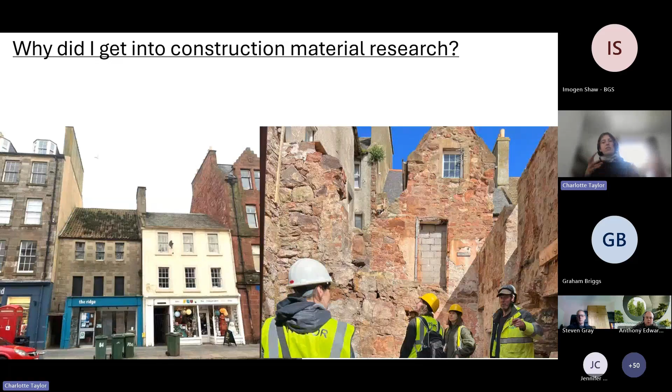So I started my PhD, which is called Ecologically Constrained Building Design: What can we build from the zero emissions resource pool? And fundamentally, it hypothesizes that to reach zero emissions in the UK by 2050, we have to stop using fossil fuels today. And if we were to do that, what construction materials could we still produce?

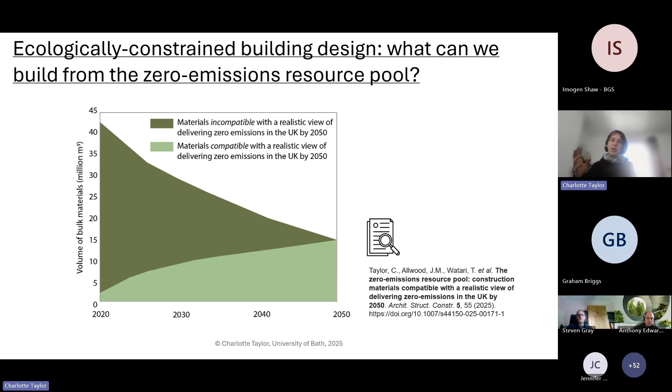And so it says, to 2050, we need to reduce the materials that are incompatible with fossil-free production, whilst increasing those materials which are compatible, all the while reducing resource use overall.

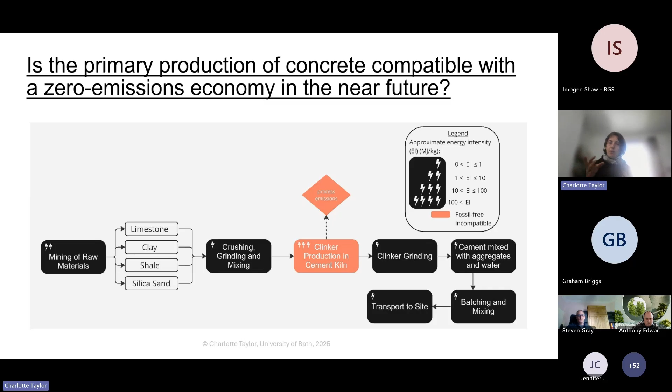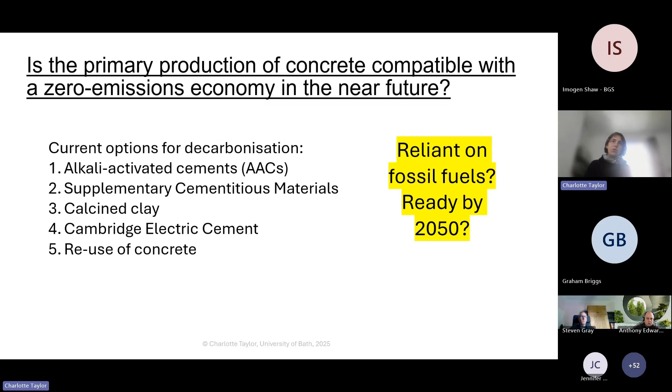So, for example, if we look at concrete, is concrete compatible with fossil-free production? We see that it's not, because during cement production, there's process emissions released, and the current decarbonisation strategies for concrete either still rely on fossil fuels or are unlikely to be ready at scale by 2050. These are some of them. So the only option to use concrete is direct reuse.

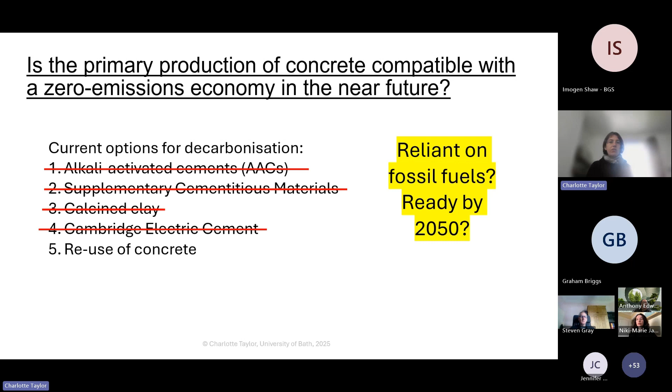Stone, on the other hand, when we look at its production process, we see that every stage along its production and manufacturing can be electrified, and therefore is compatible with fossil-free production, which is great.

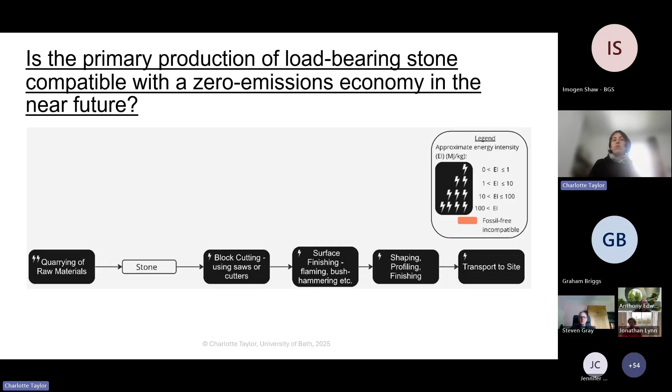But yeah, do we have enough stone at scale? What is the history and legacy of stone use in the UK? It's been used for thousands of years in construction, like Canterbury Cathedral, built in around 600 AD. And then St Paul's Cathedral, obviously built from limestone from Portland. And also whole cities in the UK built from stone as well, like Bath and Glasgow.

But today, because of innovations in the late 19th and 20th century in steel and concrete being much quicker and much more desirable, we now see stone primarily in facade systems where you have very thin sheet tiles, often clipped on to steel frames, creating very complex structures that involve a lot of energy in their production.

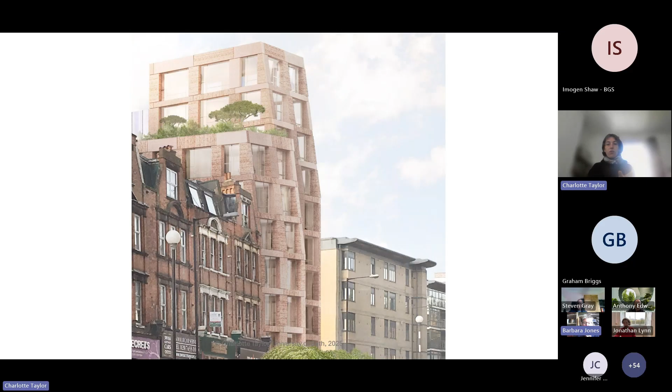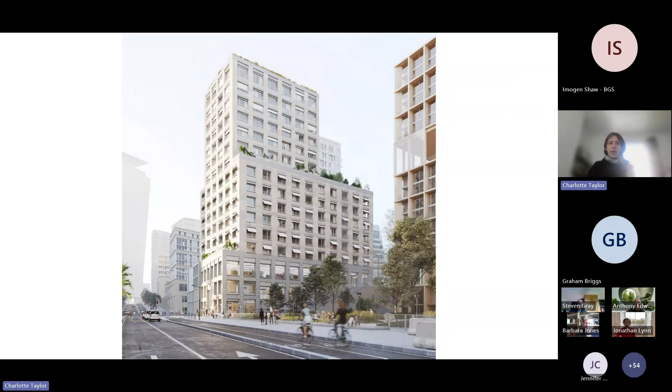At the same time, there is a resurgence now and excitement in the use of load-bearing stone in construction that's starting to become more popular. We're seeing this plan for a block of flats, I think it's 10 stories, by Groupwork Architects, and I think this is in Paris. There'll be 58 apartments built out of load-bearing stone and wood and hemp.

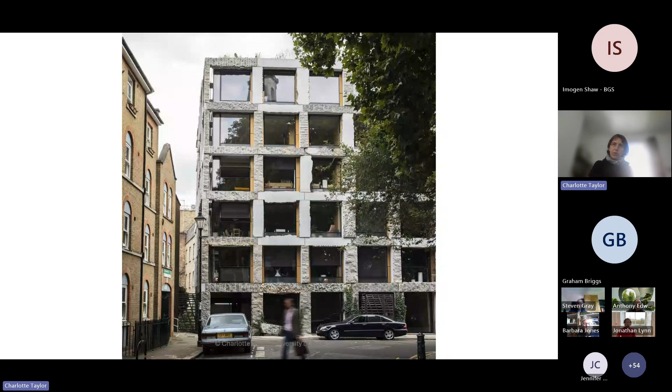And the famous 15 Clerkenwell Close is a classic example of load-bearing stone used in a modern context. And the Stone Collective have created some quite nice drawings of modern examples of stone typologies used in a load-bearing context.

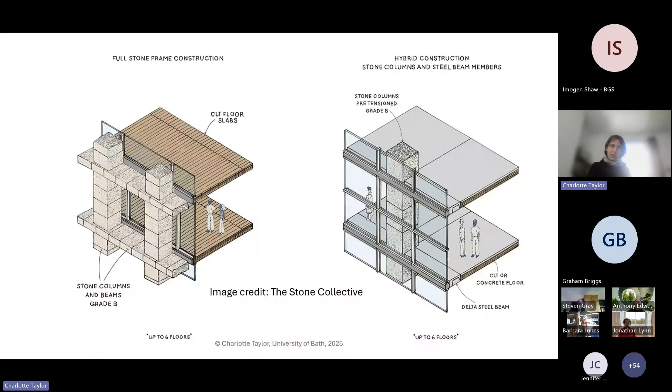Don't know if anyone knows it. It's by my favourite pub, Square and Compass.

This is just one example, but there are many building stone quarries all over the UK. But today we actually import around 80% of our dimension stone, either as raw blocks or as pre-processed products. And whilst there used to be over, I think, 3,000 dimension stone quarries in the UK, there's only around 400 producing today.

So the UK's total output of dimension stone is around 1 million tons, which is in big contrast to the nearly 200 million tons of crushed rock aggregates produced every year. And this is also surprising when 98% of major cities in the UK are within 80 kilometers of a stone quarry, we found in our study.

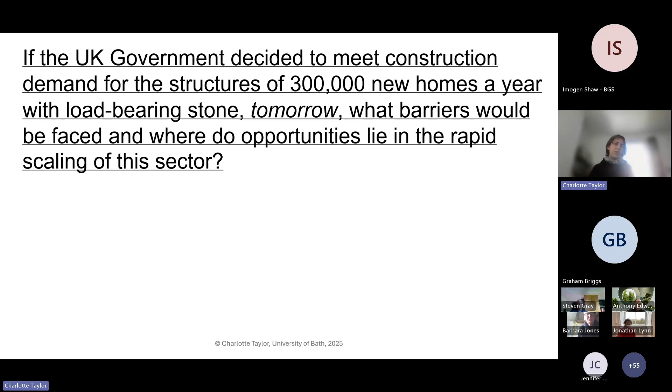So these findings and understanding of the potential for load-bearing stone in the UK, in conjunction with its history and compatibility with zero emissions, made this research question arise: if the UK government decided tomorrow to meet construction demand for the structure of 300,000 new homes a year with load-bearing stone, what barriers would be faced and where do the opportunities lie in the rapid scaling of this sector?

So I'm now going to speak about a research paper that was recently published, the output of a research project last year with fellow researchers at the University of Bath. And I'd like to say I don't know everything about the scale-up potential of load-bearing stone. This is, I guess, a step in the right direction, but there's still a lot of future work.

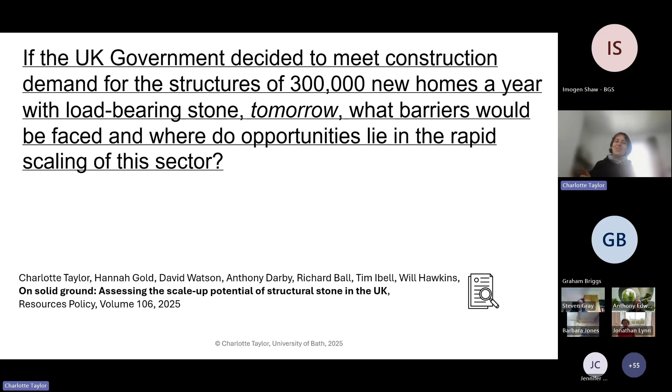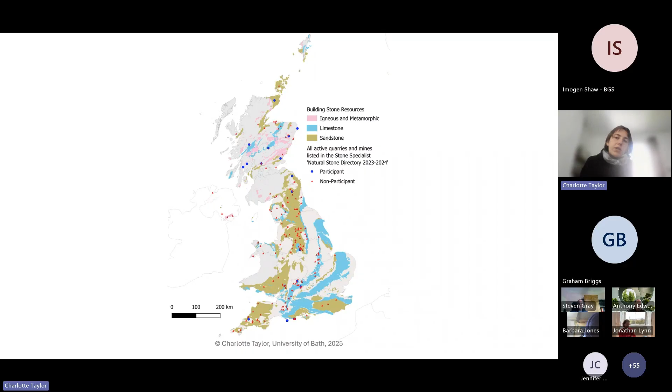Our approach to attempting to answer this question was to use interviews. We interviewed 19 different building stone and aggregate quarries across the UK and Europe, involving site visits and online interviews as well. There were 12 UK participants and 7 non-UK participants from Europe and other countries, a mixture of dimension stone and aggregate businesses.

So I'm just going to talk about the findings I think are most interesting: the total stone resource, the underutilization of stone, the decarbonisation potential of stone, the labour requirements for scaling up, and the market demand and cost of load-bearing stone.

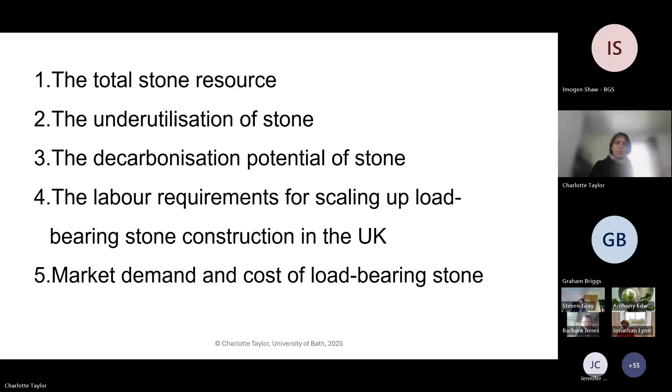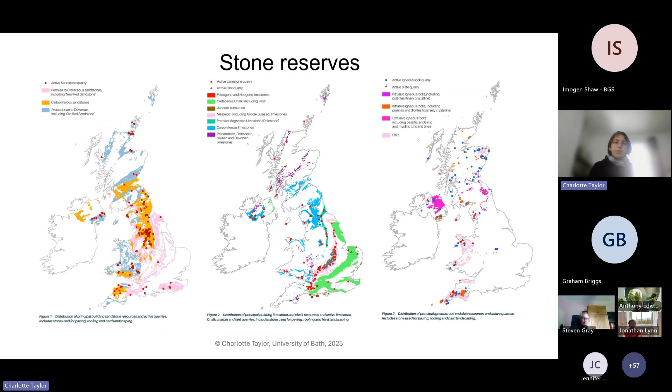I think Imogen will speak a bit more to this, but we have in the UK widely available limestone, sandstone and igneous building stone deposits. But we were really interested in finding out whether the current quarry locations and the reserves of load-bearing stone are limiting to scaling up. And we found out basically that no, it's not.

So we found that often the businesses were saying that they needed the processes to be streamlined, and like planning approval should be made a lot quicker to encourage scaling up. I'm also just going to read out some of the quotes from the interviews because I think they're quite interesting. I don't want to lose their nuance.

So one participant said, the largest quarry area with permission to extract stone is the 75-acre site. It has been operating since 1980 and we've only worked across 8 acres in that time. Another said, operations could continue for another 1,000 years at the current extraction rate. So that just gives you an idea of the scale of stone reserves, and basically that the permitted reserves and total reserves are not the limiting factor.

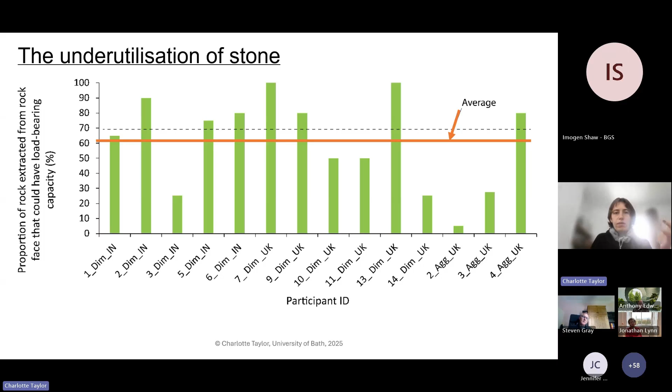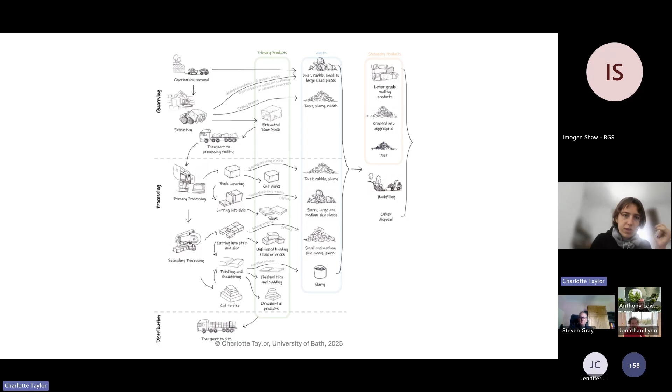So I guess most of the rock has load-bearing capacity, but it's not used in a load-bearing capacity when it's sold or used in construction. And it's mainly used in walling products or facade products. So in this diagram you can see how stone starts off extracted as a raw block, but then cascades, the more you process it, into slabs, into walling products, into ornamental products. This is what's typically happening at the moment.

So we did quite a lot of site visits, which was fun, going down different mines to try and understand the scale of rock or stone that is extracted and maybe wasted. A lot of the quarry operators don't like the word waste because they believe that there isn't any, because if they're not using it, they crush it into aggregates. But I guess waste for us is rock or stone that doesn't reach its load-bearing potential by getting utilized in construction.

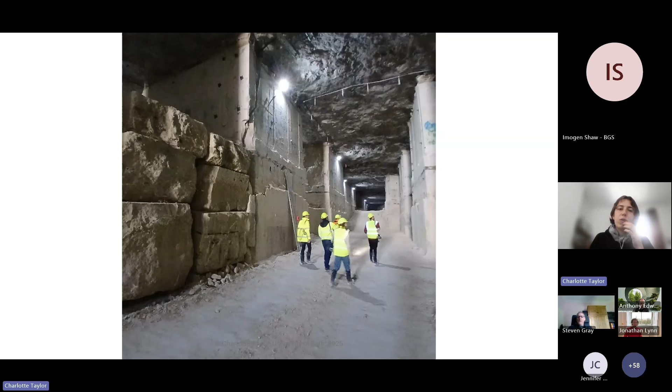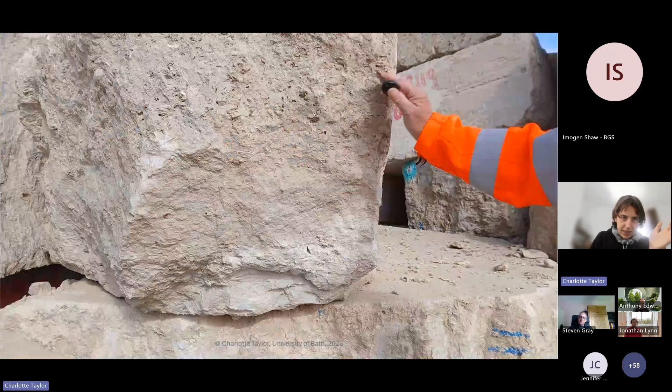So we found that stone waste arises primarily from inefficient extraction techniques. So if you're specifying too deep blocks and you can't utilize all of that from the way the bedrock is, then a lot of stone gets wasted that way. And also one of the main sources of waste is architectural preference. So when blocks have a shelly consistency or aesthetic variation, they're deemed unloved or unusable. And we were seeing a lot of sites like this, huge, almost graveyards of waste blocks. This is from the extraction stage. And then there's also quite a lot of waste which is produced during the processing stage.

Mainly because of the milling into fine tiles. So for example, when you're cutting a 20 mil tile, this can actually result in around 40% material loss, at the same time as also consuming more energy.

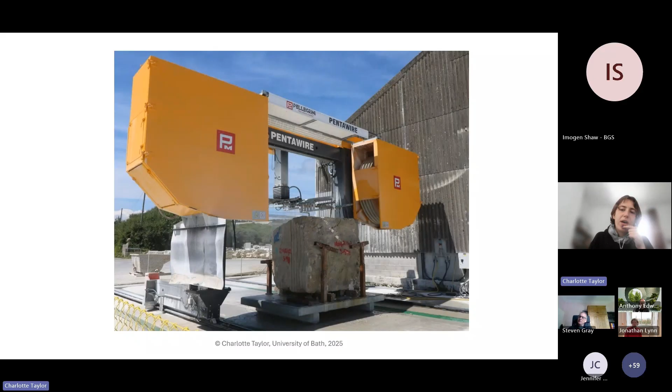Just a 5-minute warning. Oh, really? Okay. Yeah.

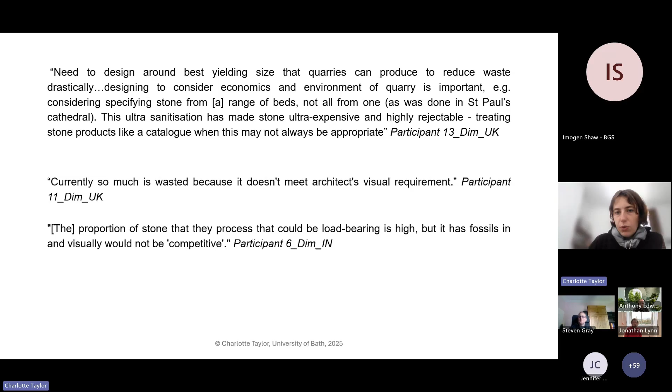So this is probably one of our really big findings, I think: how many of the participants were reporting the potential for use as load-bearing, but the architect's preference for visual uniformity resulting in a lot of waste. I'm just going to skip through this a bit.

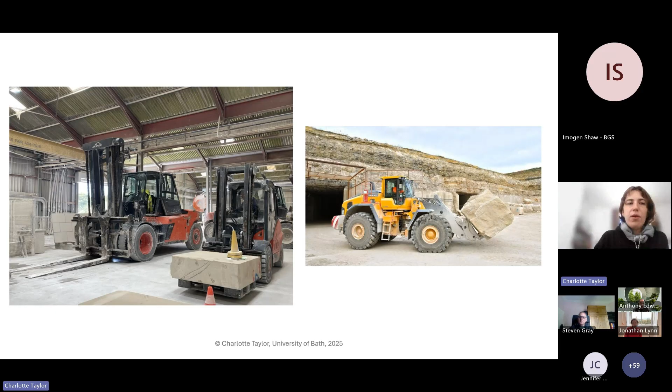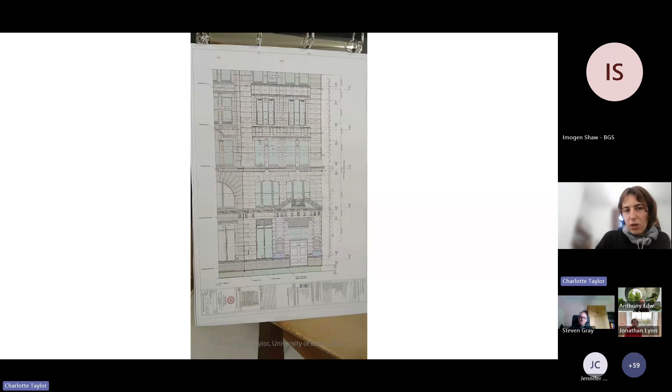There is quite high decarbonisation potential for stone, basically, with a lot of development at the moment in electric machinery. And I was also very excited the other day to visit the Pay Stonework in Stroud, where they're finding ways to reuse stone by dismantling whole buildings and using it in load-bearing capacity.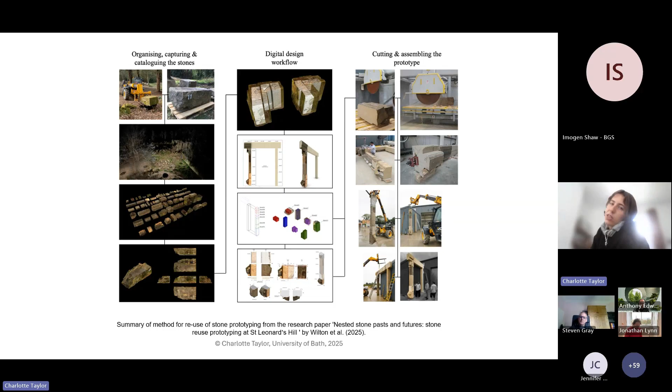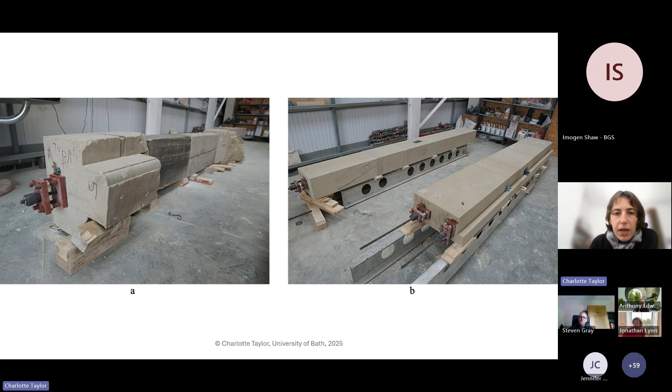And there's some quite interesting research at the moment, which is also looking at ways of digitally finding ways to reuse stone and post-tensioning it to make new columns from stone. So that's quite exciting.

Another key finding for one of the main barriers is the labour shortage in the UK. So if we need to scale up to meet construction demand, there's obviously going to need to be a scale-up of a coordinated workforce. And we found that amongst the survey participants of the study, the availability and the cost of labour pose one of the main bottlenecks to scaling up operations.

Historically, in the UK, the greater number of stone quarries would have meant that there was an increased demand for education in stonemasonry and on-site skills training. But today, stonemasonry is included on the UK Heritage Craft Red List, meaning it is at risk of disappearing, because although it's still needed, not enough people teach it.

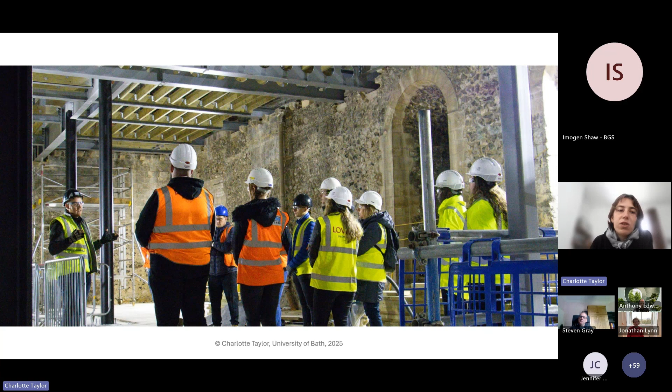And many businesses prefer to train people in-house due to the specialised knowledge required. But the lack of investment in upskilling local people in apprenticeships prevents them from scaling up their workforce currently. So this creates a challenge where the construction industry will require the equivalent of 350,000 new roles to be created by 2028, in line with the UK government's commitment to net zero greenhouse gas emissions by 2050.

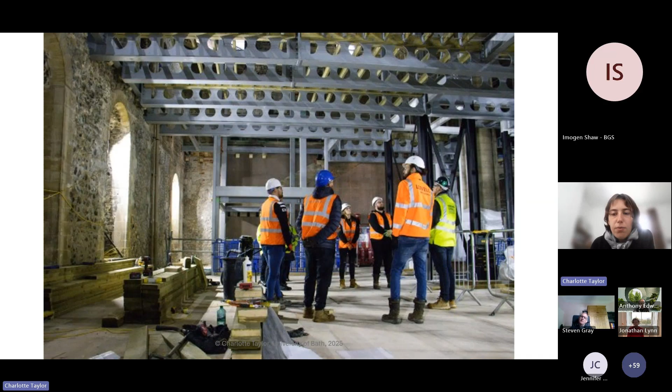One pathway would be to automate some processes, for example using CNC machines, but a lot of finishes still have to be done manually, depending on the rock type and how bespoke the product is. So therefore, future supply should comprise a combination of standardized products, such as stone bricks, but also more bespoke structural stone elements supported by well-funded training and apprenticeship schemes for all stakeholders in the supply chain, including stonemasons, quarry operators, truck drivers, contractors, surveyors, and architects and engineers.

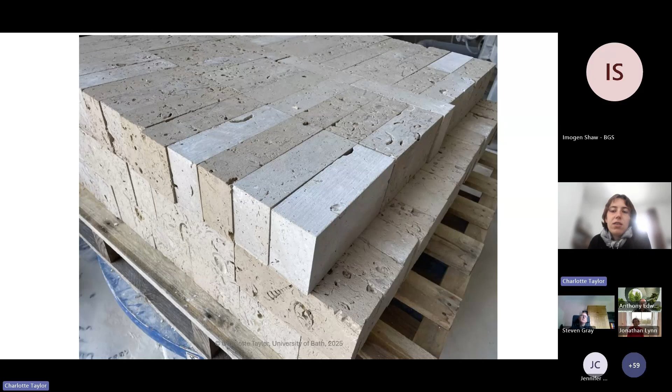So some of the things people were saying: the primary bottleneck affecting approximately 90% of operations will likely be the workforce across all levels, including extraction, transformation, and installation. Quarries are not generally nice conditions to work in, not attractive to a lot of people in the modern day. So we're noticing a decline in skilled labour. It's not a major problem at the moment, but it's likely to become an issue in the future.

And the government have brought in various grants that give money towards apprenticeships, but these only cover a small fraction of the cost, limiting the number of people we can afford to take on. Increased funding like this would help. I'm just going to skip that one.

And finally, the market demand and cost of load-bearing stone. So we found that there's really bad data on the cost of stone. It's often based on ceramic brick masonry, and the range of costs for blocks varies so much because of the level of processing. So a raw block can actually be quite a lot cheaper sometimes than concrete, but it can also be extremely expensive depending on the level of processing.

And several participants suggested that structural stone could be 60 to 70% cheaper if stone was used in its raw block or less processed form. We also found that labour was ranked around the highest cost. And people were saying things like cost could be much cheaper with increased market demand. Currently, stone is a vanity cover for buildings. If you use load-bearing stone and get rid of steel and concrete, the cost could drop by 60, 70%.

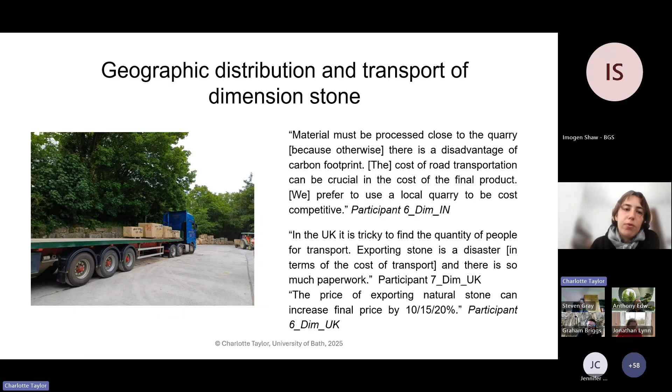And so together these challenges expose the complex conditions shaping the scale-up of structural stone in the UK. The material's promise lies not only in its geological abundance, but also in how quarries, architects, engineers, and policymakers might reconfigure their relationships.

Unlocking its low emissions potential requires rethinking value beyond aesthetics, investing in new forms of labour and mechanisation, and embedding load-bearing stone within cultural, technical and regulatory frameworks that together determine how holistic zero emissions futures the built environment can sustain.

So this work was just an initial step in assessing the scale-up potential of load-bearing stone in the UK, but future research is needed into other critical aspects of stone use in the UK, including resistance to weathering, fire, and also I really think that this connection between labour and workforce upskilling and stone is a project that I'm really excited by, and I think needs a lot of work.

So increased uptake will depend not only on technical performance, but also on building greater confidence amongst designers, clients, insurers and contractors through improved knowledge, familiarity and built precedent. So I think that's me done now.

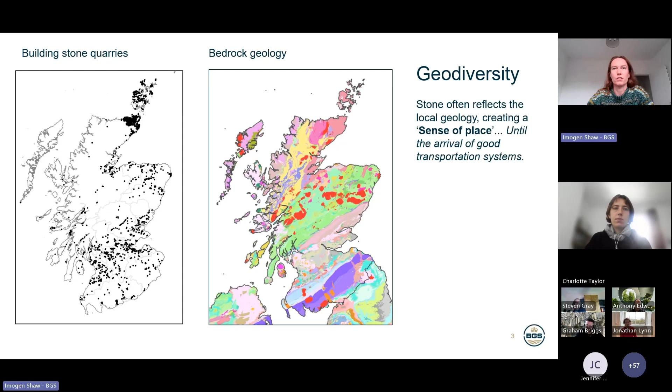We've got a map on the left of building stone quarries, and these are just the ones that we have written record of, and they're over 3,700. So really stone has been quarried all over the country for different uses. This just shows the geology broken down into different stone types.

And each of these different stone types, because it's got slightly different geological properties, tends to be used in slightly different ways. So granites and dolerites, igneous rocks, are usually very hard, not very porous. It makes them very durable materials, but sometimes quite difficult to work in ornate ways. So it gives you grand, imposing buildings in Aberdeen, which are usually just flat facades. They're often used as setts and things for paving.

Sandstone, on the other hand, is much easier to work. So in the central belt of Scotland, where you've got a lot of sandstone that outcrops and has been quarried, you have very beautifully carved sandstone buildings. Flagstones are actually geologically quite similar to sandstones. They're both sedimentary rocks, but flagstones have been laid down in very distinct layers, which means they split into nice flat slabs, which makes them good for paving.

And slates are metamorphic rocks, and effectively they're very impermeable, and they split very thinly, which means we've used them on roofs all over because they're perfect. They shed the water, they don't absorb it, and you can split them quite thin, so they don't put too much load on your roof.

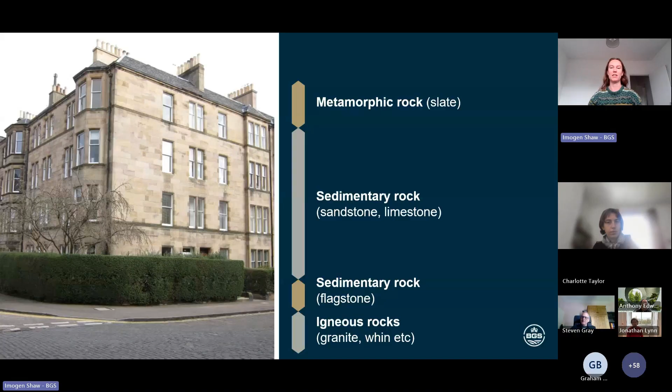And that means that, if we go back to this great range of stone types here, most of these are no longer being produced, which is a problem for heritage. It's also a problem for creating new builds that are in keeping with the local character that you've got. And it's just a problem for the stone industry, because we are using less stone, as Charlotte touched upon. We've moved into using concrete and brick and steel and things. But we're also still using stone, but most of it is coming from overseas, and that's a lot of money leaving the UK economy, and also has big carbon implications.

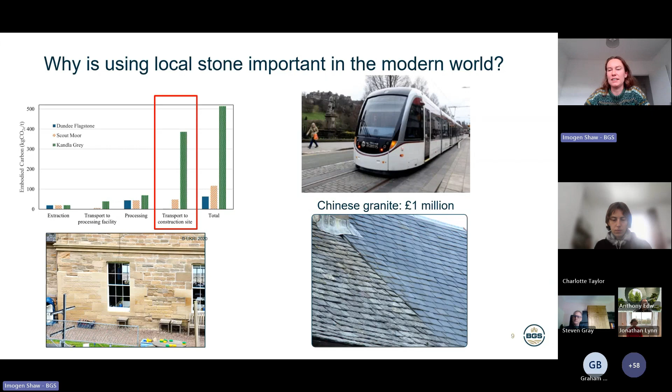So we really wanted to look at, okay, this is a problem, and there are some identified benefits to using UK building stone, but we've only got 17 quarries in Scotland and a few more in England and Wales and Northern Ireland, and so it would be great to bring those back, but realistically, you can only support a building stone enterprise if there's a market for the stone. So we wanted to have a look at that first.

Charlotte touched on it. The data is really, really patchy, particularly for building stone production in the UK. But we had a look at imports and exports and found some interesting things. It's basically that imported stone is increasing both in terms of mass and value that we're importing every year.

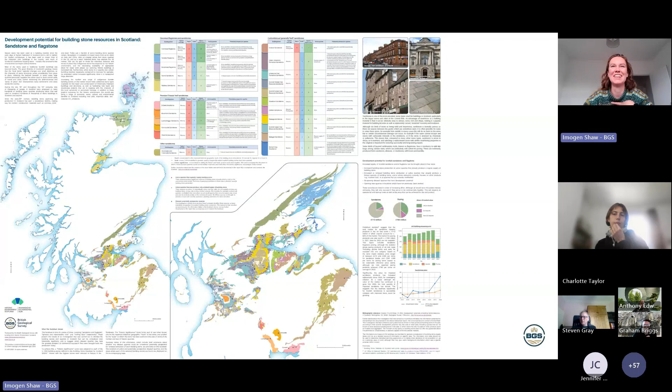So just to finish off, I wanted to touch more deeply on one of the stones that we identified as being the most historically significant, and a quarry that has been closed for about 60 years but has significant potential now to reopen and is really exciting, as a little case study that this kind of thing can actually be pulled off. So Scottish slate, all types of Scottish slate that have been quarried in the past were deemed historically significant. There are three main types: West Highland slate, Highland border slate, and Macduff slate. And here's the picture again.

The critical thing about all of these types of Scottish slate is none of them have been quarried in about 60 years. So we're seeing increasing numbers of slate roofs needing repaired or completely re-roofed, and there's no appropriate material really to repair them with. And so you've got a significant supply issue. UK slate production as a whole, not even just in Scotland, has been decreasing, but slate imports are increasing all the time, and the price of the slate is increasing. And so there's this huge market for slate, and you can't get an appropriate material in Scotland, and we really need it. And so it's looking good.

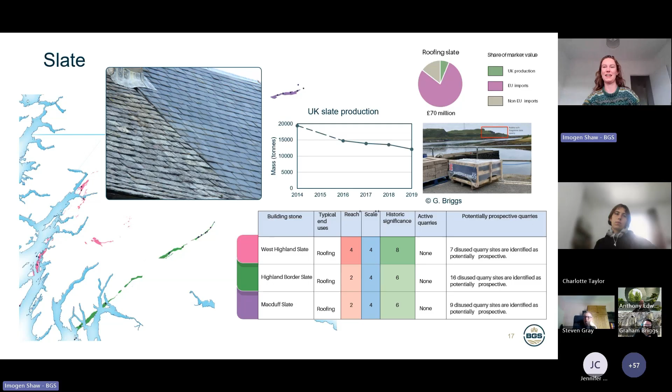But Cullipool, I'll go back. Cullipool quarry quarried West Highland slate, which is the pink on the map. It's just one of the islands out on the west, and that was like the big industry of the island at the time, known as the islands that roofed the world. So it was a really, really significant exporter internationally of this really high quality slate roofing material.

So there were deeper investigations done into this. The important thing about the study that we'd done for development potential is it's a really broad starting point. So any individual quarries that are identified will need to have greater geological investigation and things. There's a lot more paperwork to do, but it's a start.

And so basically the more paperwork has been done at Luing, and it found that there was actually significant resource left in the quarries, and it was possible to reopen them, and also combined with how brilliant it would be for everyone to have a source of Scottish slate. It would also be really good for the village that's there, because they're suffering from advancing coastal erosion, and in the past the waste from the quarry was just tipped directly onto the beach in a type of coastal nourishment.

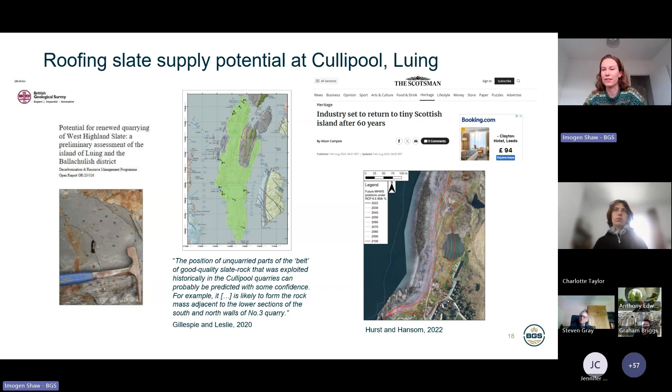And so the exciting news here really is that they've got planning permission and funding to resume a small slate quarry on the Isle of Luing. I think it's going out to tender soon, and planned trial production to start next year. So it's just a nice little case study that when the stars align, this really is a feasible thing to do, and hopefully can be done in other places too.

So just to wrap up, these are the main messages of the talk: Scotland has a huge variety of natural stone resources that have been used in all types of buildings for thousands of years. And there is still a demand for natural stone, but we're not meeting it with stone from the UK, which is a shame, because there are all sorts of benefits that could be brought by meeting it that way.

And we found that the Scottish stone industry has potential to grow if it's supported in the right way, but crucially, to realise that potential, there needs to be investment, and there needs to be support on the specifiers side, and things like that. And so it's very exciting to see architects and people more interested in designing with stone too. So I think that's me.

Okay, thanks, Imogen. Yes, and if you're on your travels in Oban, go and visit Luing. It's a wonderful place, and it's starting to get very real with a potential slate quarry to be opened. So we're just going to go straight to questions, and I'm going to ask very quickly the first question. So this is to both of you, if you just give a very quick one-liner.

We have this fantastic material beneath our feet that we're currently importing over 80% of. So what do we need to do as specifiers, designers, to get indigenous stone suppliers a bigger piece of the pie here? Because we don't need to grow the market, we just need to get indigenous stone in front of the right people. So what would be your one key action that you think would help support this? I would say if you're working on a project, then find out what your local quarry is. Go and visit it, see what the range of stone there is they supply, and then start from there.